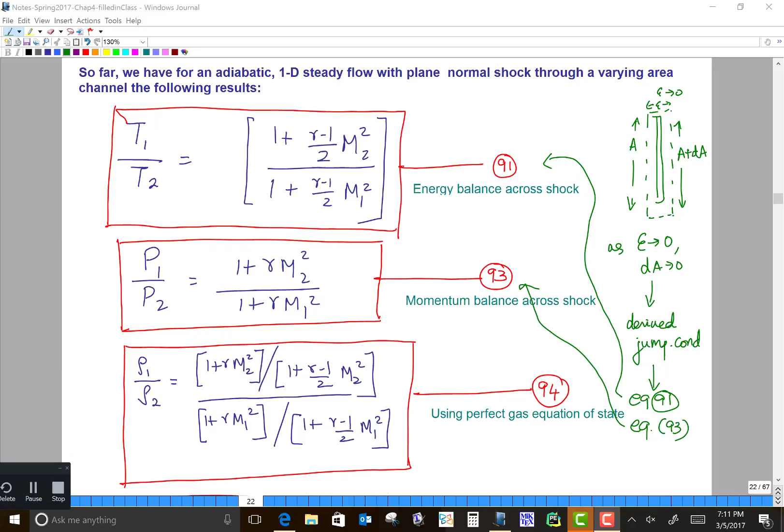We derived equation 93, which is here. And let me put this somewhere here. Okay, and what else? Now we assumed an equation of state, which is an ideal gas equation of state, and that gave me equation 94.

Now, the one thing we didn't use so far in deriving these equations is the mass conservation across the shock, or the jump condition derived from mass conservation across the shock. So you take all of this, then add rho 1 v1 equals rho 2 v2, which is the mass conservation across the shock, and simplify it, and you get equation 101. So this is an interesting equation.

This interesting equation 101 is such that if you know M1, and if you know what the gas is, meaning you know gamma for the gas, you can get M2, right?

So what this means is, if you know the inflow Mach number and you know there's going to be a shock, you can get the Mach number before and after. Since the shock is infinitesimally thin, both locations are the same in spatial coordinates, which means the Mach number is not a continuous function. At the location of the shock, x equals a, x equals a plus gives M2, and x equals a minus gives M1, the Mach number ahead of the shock. This means as you go from a minus to a plus, the Mach number drops across the shock.

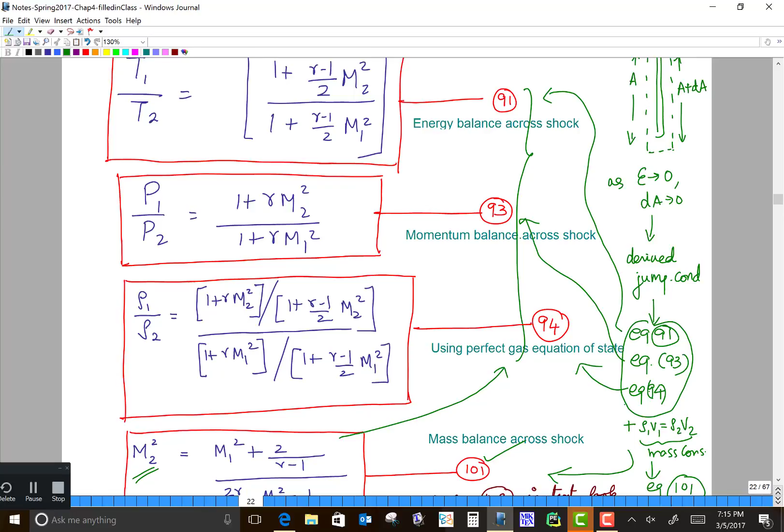From a problem solving standpoint, this helps us, but what is the interpretation? We had some fantastic interpretations last class. The first is that M1 needs to be supersonic and M2 needs to be subsonic for a shock to exist, because the shock is a compression shock, and that's the mechanistic reason. The mathematical or thermodynamic reason is that we computed S2 minus S1, and observed that S2 minus S1 is greater than or equal to 0, satisfying the second law, only when M2 is less than M1.

The other thing we observed is, for this equation: if M1 greater than 1, M2 less than 1, and if M2 greater than 1, M1 tends to be less than 1. So they used to assume pairs of solutions - the same pair works for both M1 and M2 if you switch them. For example, if M1 is 2 and M2 is 0.5, then M1 equals 0.5 would give M2 equals 2. But from the second law, this case is not possible. This means M1 greater than 1, so the incoming flow needs to be supersonic, and M2 less than 1, the outgoing flow behind the shock needs to be subsonic. That's the only solution possible.

And when does this happen? This happens if you take this to this equation, that is P1 by P2 equals 1 plus gamma M2 squared by 1 plus gamma M1 squared. So M2 is less than 1, this is greater than 1, which means P1 by P2, this entire function, is less than 1. Which means P2 is higher, or the flow is getting compressed. So this implies compression.

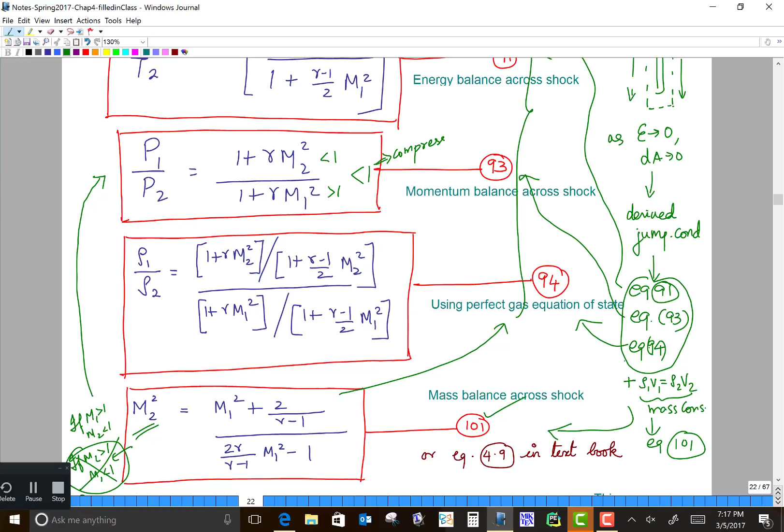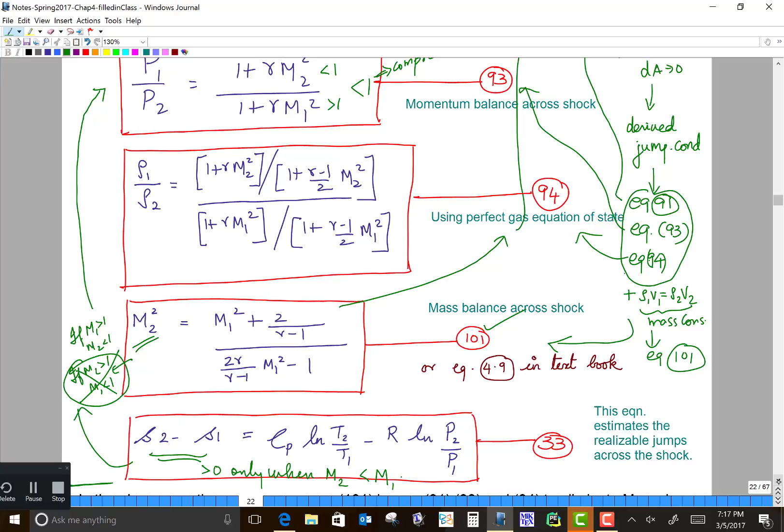So this is the basic idea. We derived these equations and learned quite a bit about the physics, and we observed that only a compression shock is possible. Now it is high time that we relate this material to what we learned in the previous chapter. In chapter 3, what did we focus on? We focused primarily on isentropic flow, specifically isentropic flow in a nozzle. And what did we say there?

So we discussed a lot of physics there, but one of the major things we took away is that P, T, rho, M are all functions of X, and P naught, T naught, rho naught are invariants. This implies that if I know P naught and P at say x1, I can get M of x1. And if I add T naught, I can get T of x1, which means I can get rho naught and rho of x1. So if I know P naught and the pressure at any location, I can get the Mach number, and if I also know T naught, I can get the temperature. I can pretty much get everything that I want at that location.

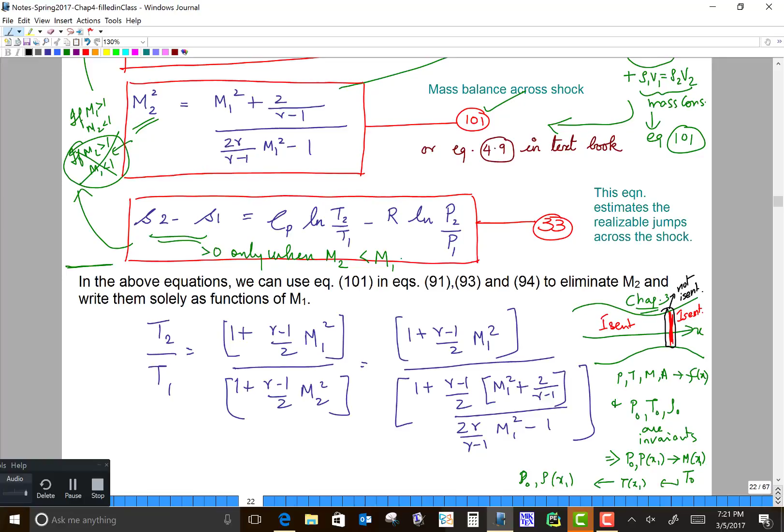So pretty soon, in probably the next few minutes, we will learn how to combine these. But before that, I want you to look at this set of four equations. Let me zoom out a little bit. So we have these four equations: 91, 93, 94, and 101.

These four equations have a structure: the left-hand side is the ratio T1 by T2, P1 by P2, rho1 by rho2 in the first three equations. The right-hand side, if you know gamma, requires M1 and M2. The fourth equation gives M2 as a function of gamma and M1. So if I plug in this expression for M2 squared into each of these equations, T1 by T2, rho1 by rho2, and P1 by P2 can each be written purely as a function of M1.

So now I get three equations relating T1 by T2, P1 by P2, and rho1 by rho2 as functions of Mach number M1, and M2 is already a function of M1. This means if I know M1 and a shock exists, I can get everything about the ratio of property jumps across the shock: the Mach number behind the shock using equation 101, and then plug M2 into 91, 93, and 94 to get the ratios.

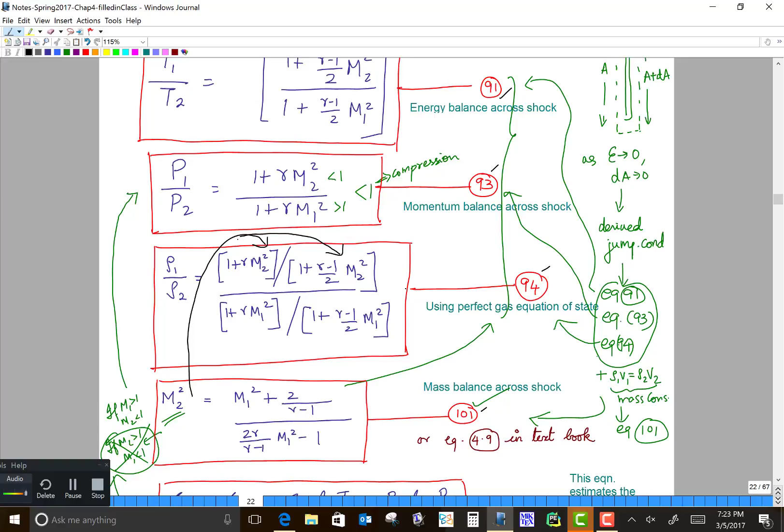So now we're going to derive a new set of equations. Here I'm writing T2 by T1 equals 1 plus gamma minus 1 by 2 times M1 squared, divided by 1 plus gamma minus 1 by 2 times M2 squared.

So use equation 101 for this M2 squared, which is this guy. Let me block this material here, sorry for the messy writing.

Now I'm going to plug this equation 101 that we derived here. This is equation 101. We use that equation 101 to... let's see, okay, where did I go? I'm sorry.

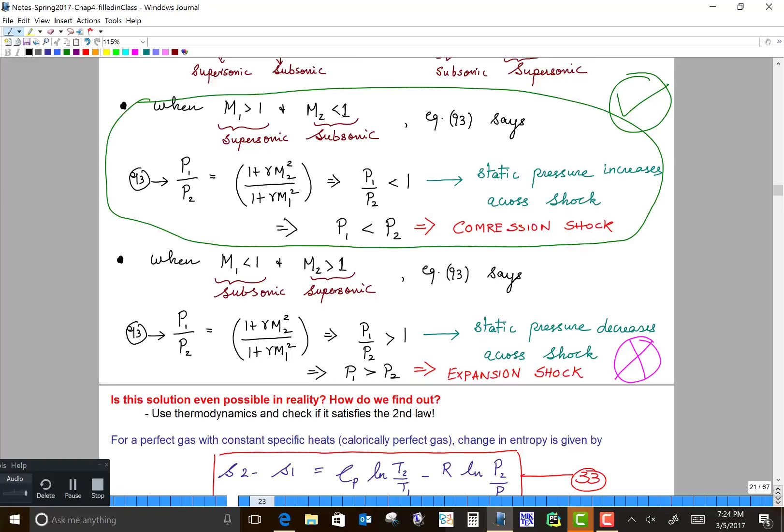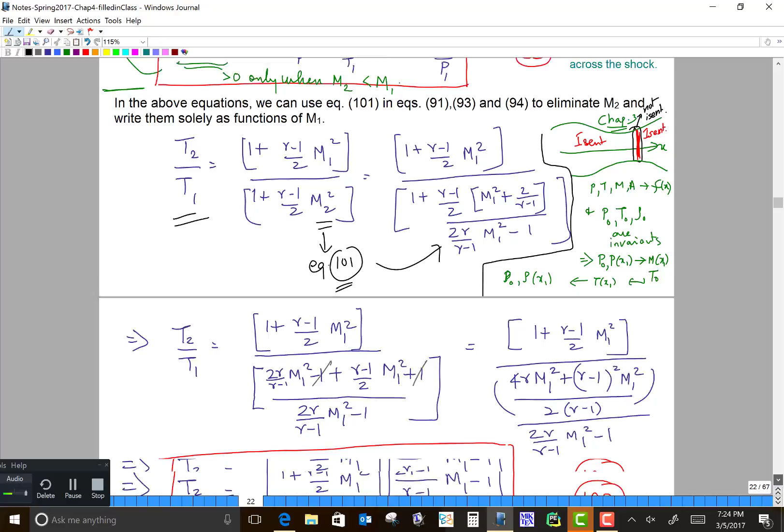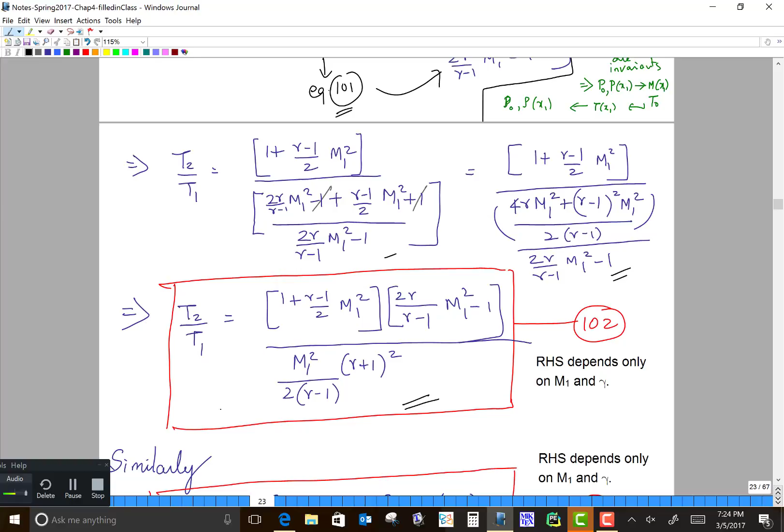So I have this equation 101, plug this in here, and then I'm going to have a slightly messy expression which I can simplify, and I get a nice final expression where T2 by T1 is basically purely a function of M1. So my T2 by T1 equals a function of M1.

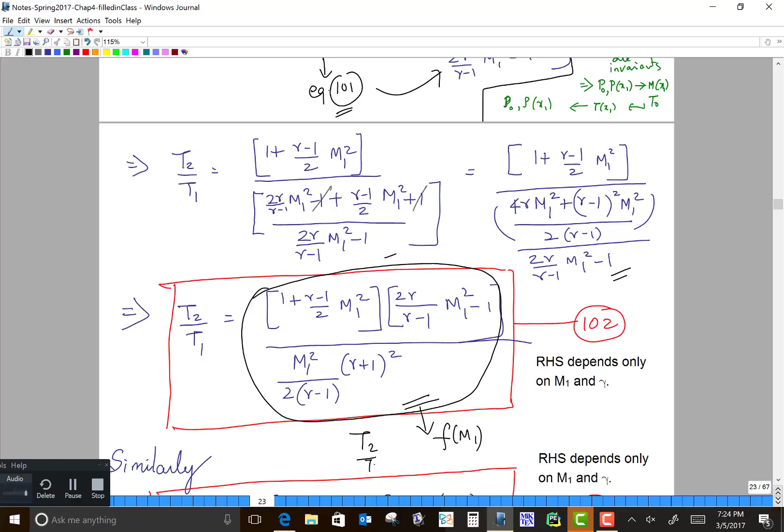Similarly I can derive P2 by P1, which is a function of, let's call this G of M1. In principle it should be G of gamma comma M1, but I'm assuming gamma is a constant that typically does not vary that much. So let's assume gamma is some constant. G is a function, so P2 by P1 is again going to be dependent only on the value of Mach number of the incoming flow, which is M1.

And if you know P2 by P1 and T2 by T1, I can get, using the ideal gas equation of state, meaning using 102 and 103, we get rho 1 by rho 2. So we can do that, and that's pretty much what it is.

Your textbook mentions a subtle observation which I think is useful. What the textbook says is if you use the mass conservation jump condition, you get rho 1 v1 equals rho 2 v2. So instead of using this approach, it uses this equation, and your rho 1 by rho 2 is nothing but v2 by v1. This is a useful relationship.

And writing this v2 as a function of Mach number times speed of sound, so it's M2 times a2 divided by this, which is M2 a2, and this is M1 a1. So now I have this v2.

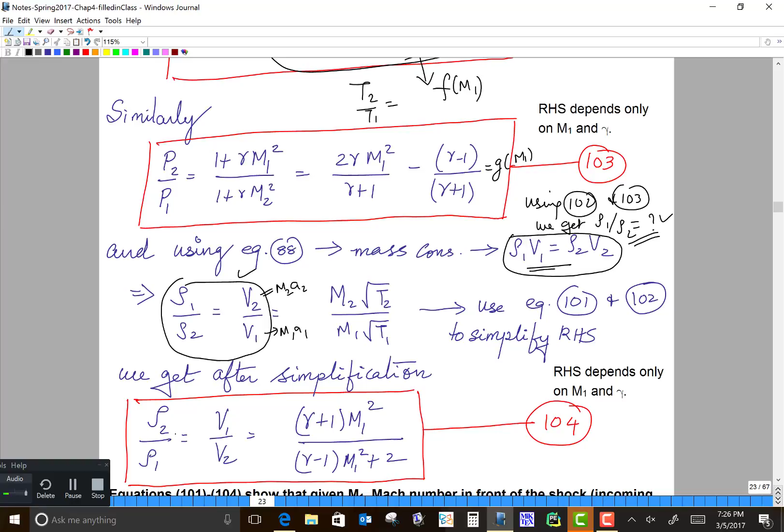It's amazing, I have skipped the steps here, but it's easy to derive. So my rho 2 by rho 1 equals V1 by V2 equals gamma plus 1 M1 squared divided by gamma minus 1 M1 squared plus 2. So this is quite interesting.

So if you know rho 2 by rho 1 using the mass conservation, I can also get V1 by V2. This is an interesting part of the notes that I want to highlight.

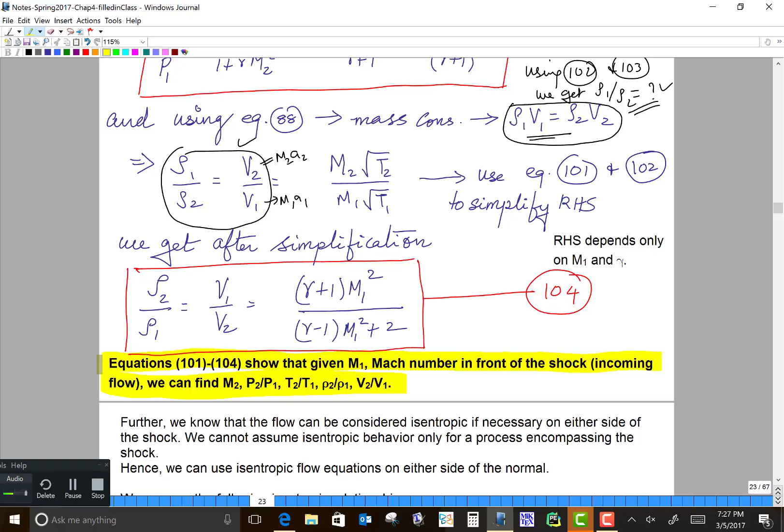So I've numbered this new set of equations as 104 for rho 2 by rho 1, 103 for P2 by P1, and 102 for T2 by T1. These new equations where T2 by T1, P2 by P1, rho 2 by rho 1 are written purely as a function of Mach number M1 alone.

This is the statement worth highlighting: if I know equations 101 to 104, then knowing M1, I can get M2 from equation 101, P2 by P1 from equation 103, T2 by T1 from equation 102, and rho 2 by rho 1 and V1 by V2 both from equation 104.

So using these equations, I can pretty much get P2 by P1, T2 by T1, and rho 2 by rho 1. That is where we stand right now. I know if I know what M1 is at a given location, and I know that a shock is going to happen at that location in the nozzle, then I know immediately using these expressions.

Imagine I have a nozzle and I have a shock at some location in the diverging section of the nozzle, say at a location where my area is 2 times the throat area, in the diverging section of the nozzle.

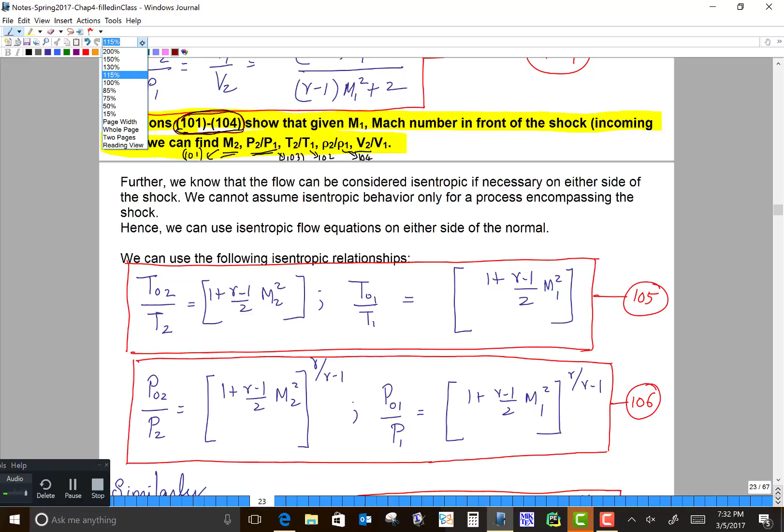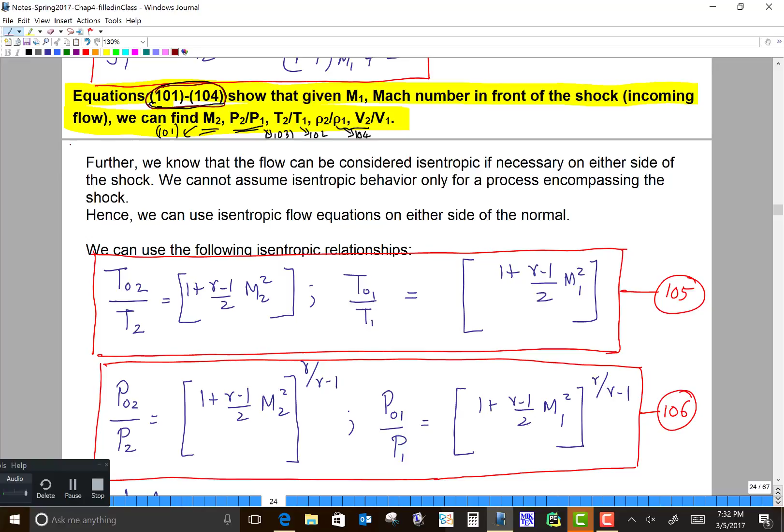So in the nozzle, let me draw a schematic. I'm sorry the size of the document is going to prevent me from making this into a nice big picture, but let's imagine—let me insert a new page here.

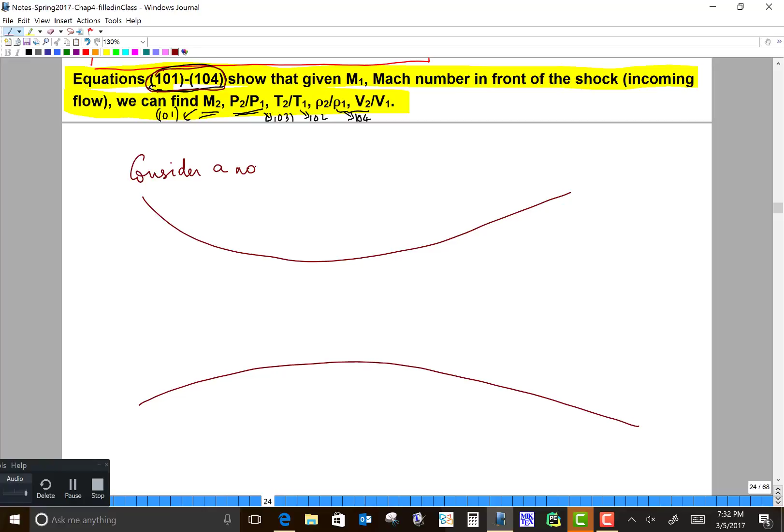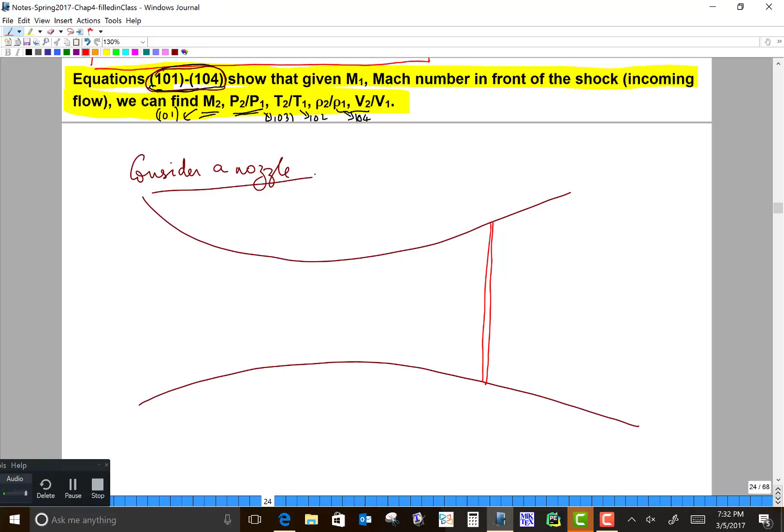So now consider a nozzle like this. Now somehow a shock forms at this location—it's a normal shock.

So here the property at this location—let me draw a small hash line to represent the location in front of the shock and a small location behind the shock. These are separated by an epsilon, and epsilon is very small, say about 10 power minus 7, or about the order of a micron.

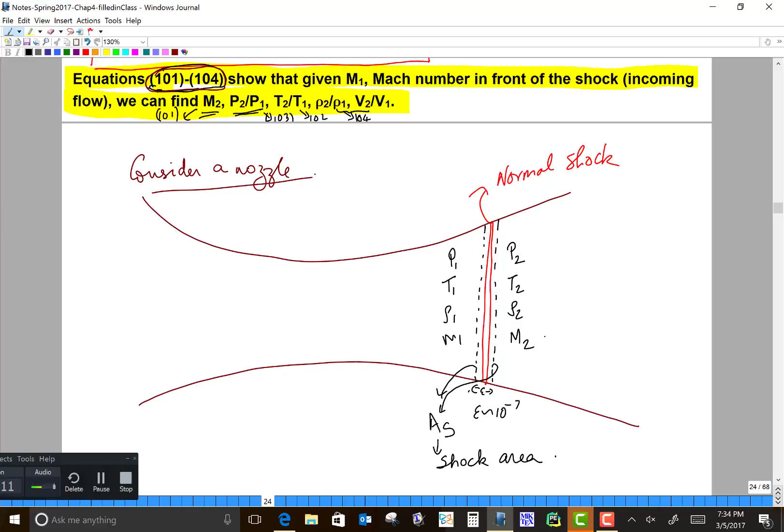So this is epsilon, 10 power minus 7. Then I'm going to have P1, T1, rho 1, M1. Let's call this area and this area both AS, the shock area. And then behind the shock I'm going to have P2, T2, rho 2, M2. Let's call this isentropic flow 1.

Okay, and this is isentropic flow 2. So what did we learn from chapter 3? Each isentropic flow in a 1D steady nozzle flow is characterized by a unique value of P naught and T naught. So let's call this: there is a unique P naught comma 1, T naught comma 1 corresponding to isentropic flow 1, and rho naught comma 1.

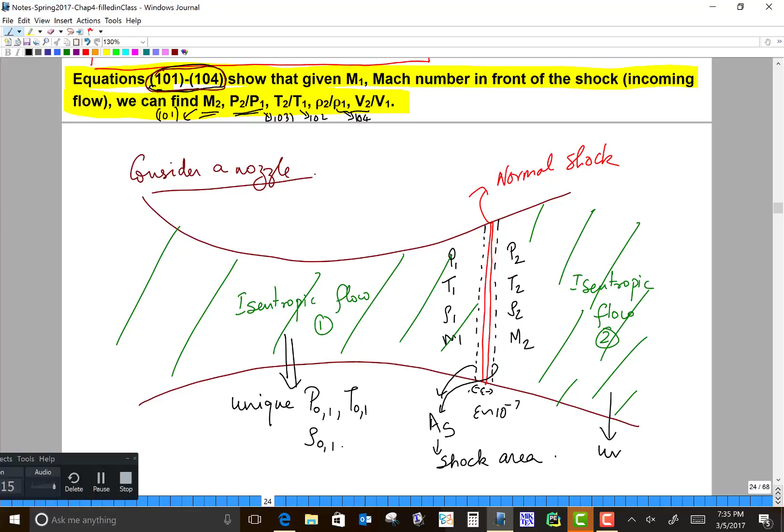Similarly, there is a unique P naught 2, T naught 2, rho naught 2. Okay, I guess I didn't put a comma on the other side, so I'm just going to make it P naught 1, rho naught 1.

Now let me draw this. So let's circle this and this. Now the question is, let me use a blue color: how are these related to each other? And that is the question we are trying to answer. Answer, next page. So that's what we are trying to do.

So what we can do is, for this isentropic flow region 2, you can use the isentropic flow relationships: T02 by T2 equals 1 plus gamma minus 1 by 2, M2 squared. Let me use a different color: this is just behind the shock.

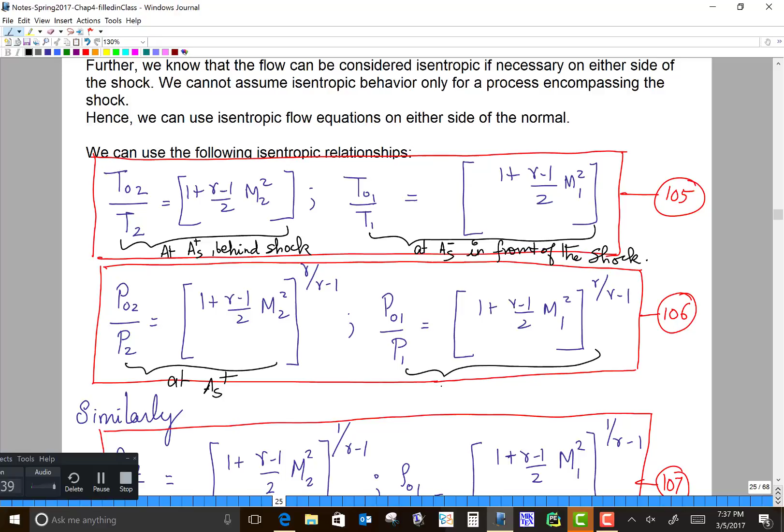And this is valid in front of the shock. So you can call this AS plus, that is just behind the shock, and AS minus, in front of the shock. Similarly, this is AS plus, AS minus. So let me go to the previous image and characterize this.

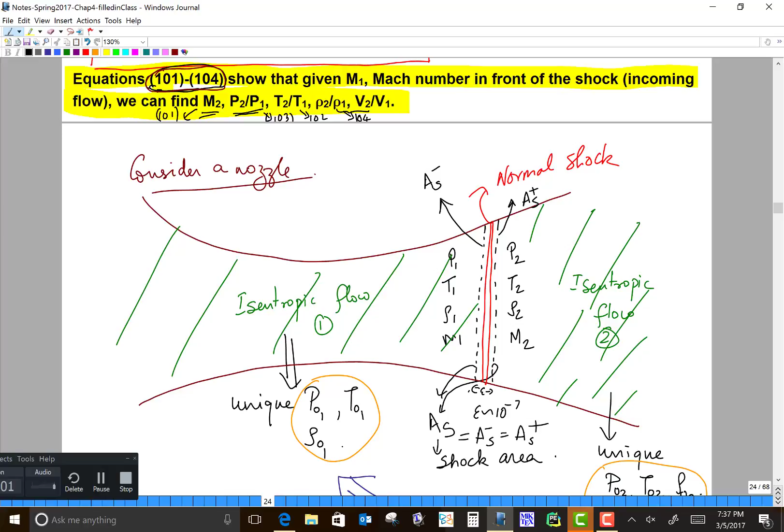So this is AS minus and this is AS plus. AS equals AS minus equals AS plus. Clear? Okay, so mathematically we have cleared it.

So now these expressions are valid because the flow is isentropic just in front of the shock and just behind the shock. The only place where the isentropic relations are not valid is across the shock. But for those regions, we have already computed what P2 by P1 is and what T2 by T1 is, as a function of M1.

So similarly, this is again valid at AS plus, at AS minus. So now you can combine these chapter 3 expressions, these isentropic flow expressions, with the expressions you already derived for the jump in properties across the shock: the T2 by T1 and P2 by P1 expressions from chapter 4. And that's what we are doing here.

So what we are saying is we need to compute this. To compute this, we write it as T02 by T2 times T2 by T1 times T1 by T01. This is the isentropic 2 equation, this is the isentropic 1 equation, and this is the shock jump equation.

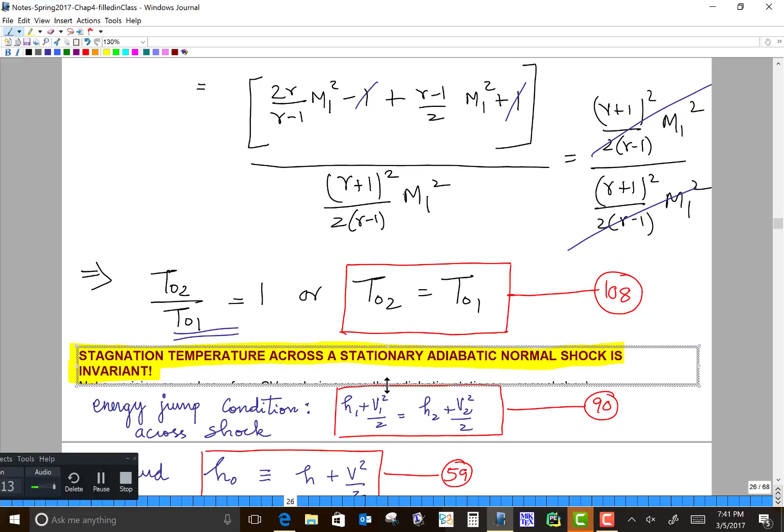And this is not a surprising result at all, and there's a reason why it is not surprising. This is because the control volume analysis for the energy across the shock gives you a jump condition.

And what is that jump condition? It's equation 90: h1 plus v1 squared by 2 equals h2 plus v2 squared by 2, correct? This is the equation.

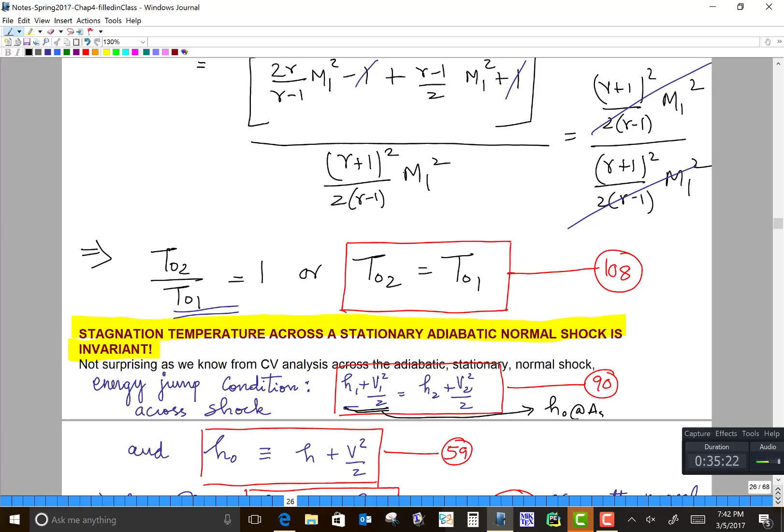So what we observe is your h1 plus v1 squared by 2 is nothing but h naught, but h naught corresponding to what? We can write this as h naught at AS minus, and this guy is h naught at AS plus, okay?

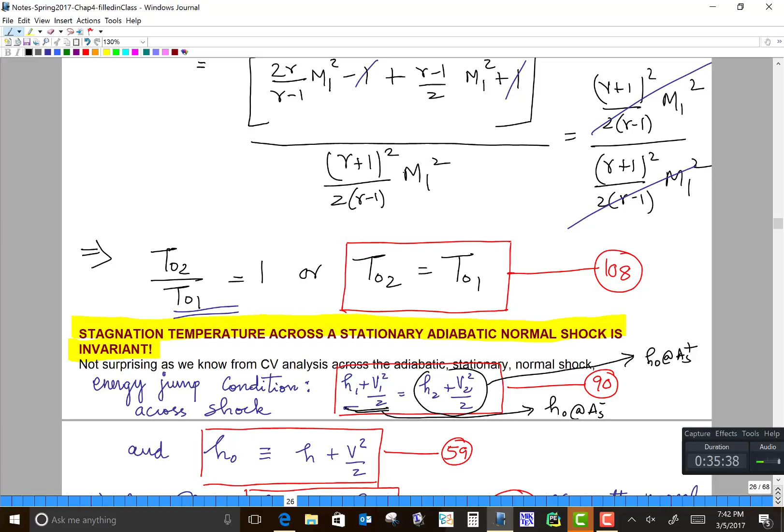And what does this equation tell you? That h naught at AS minus is the same as h naught at AS plus. And what do we know already? That h naught remains invariant for isentropic flow. So h naught at AS minus is the h naught in isentropic flow 1, and h naught at AS plus corresponds to isentropic flow 2. And this tells you that h naught does not change across the shock.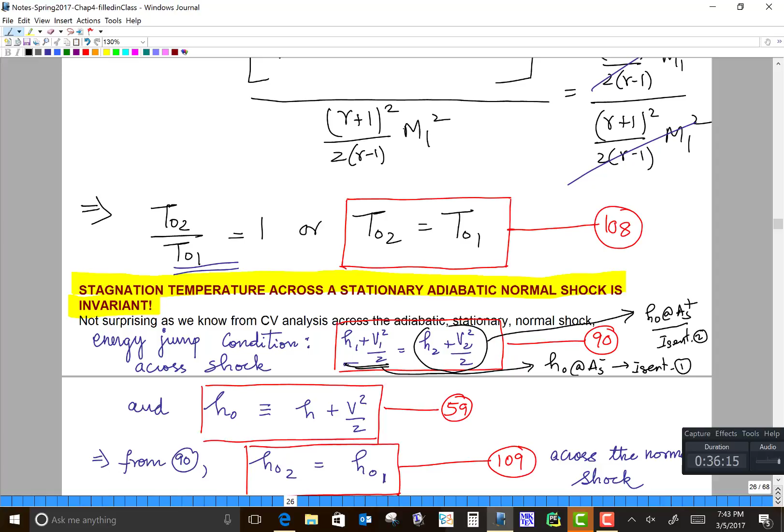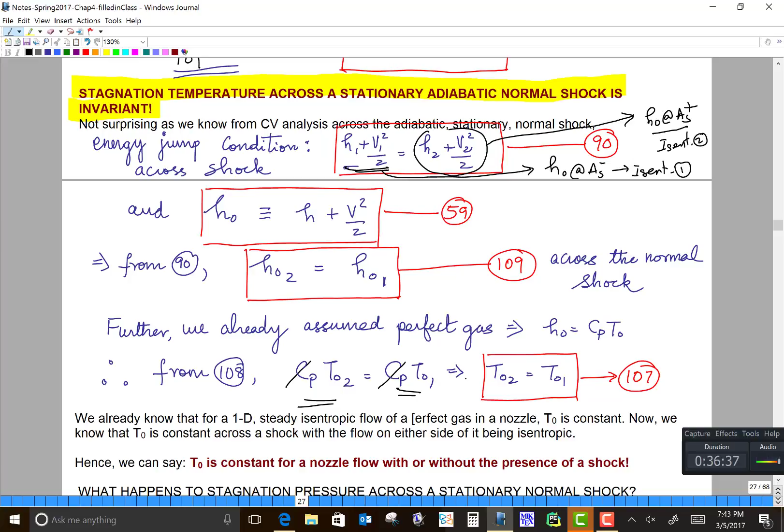That's the jump condition. For a perfect gas where Cp is constant, you can write h naught as Cp times T naught 2 for h naught 2 or h naught at AS plus. And you can write h naught 1 or h naught at AS minus as Cp times T naught 1, which means my T naught 2 equals T naught 1 because Cp is constant. So that's the simple derivation for this flow.

Similarly, I can compute, I know the expression for P naught 2 by P2, this is isentropic flow 2, this is isentropic flow 1, and this is the shock equation. So I can combine these three equations to get P naught 2 by P naught 1 as P naught 2 by P2 times P2 by P1 times P1 by P naught 1.

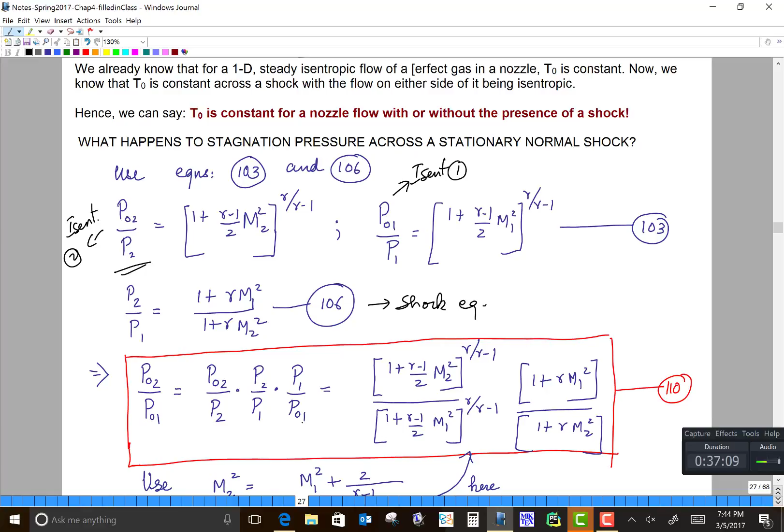So I can simplify this expression and plug in wherever I have M2 squared using this expression. So after much simplification, I have put dot dot dot here - I'm not interested in simplifying it fully. You get this expression: P naught 2 by P naught 1 is gamma plus 1 by 2 M1 squared divided by 1 plus gamma minus 1 by 2 M1 squared, raised to gamma by gamma minus 1, times 1 divided by 2 gamma by gamma plus 1 M1 squared minus gamma minus 1 by gamma plus 1, this entire term raised to 1 by gamma minus 1.

So this term is a complicated expression. This corresponds to equation 4.15 in your textbook and 111 in our notes. This equation relates P naught 2 by P naught 1, the stagnation pressure on either side of the shock, or corresponding to the two isentropic flows on either side of the shock, to the inflow Mach number M1. So this is quite interesting.

So let me ask you - we already know that P2 by P1 is going to be greater than 1, right? Because it's a compression shock. If my M1 is supersonic, M2 is subsonic, which means for supersonic flow, my P2 by P1 is greater than 1. So we know that, correct? Or my P1 by P2 is less than 1.

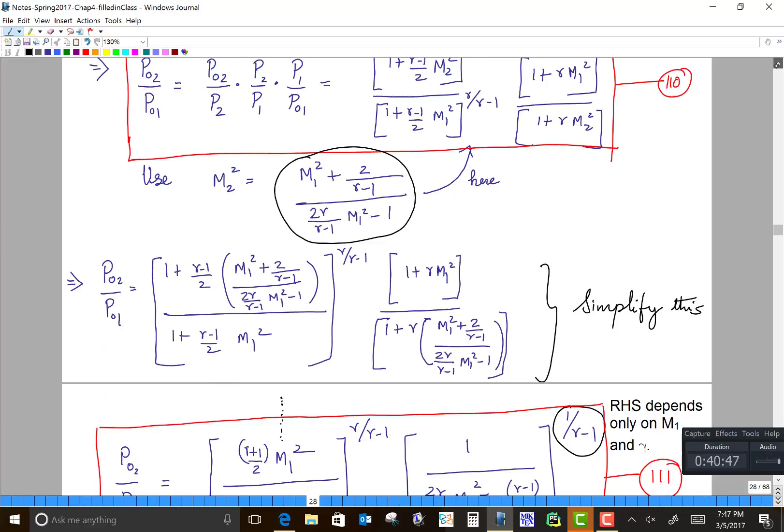Okay, what is my P naught 2 by P naught 1 expression? This is 1 plus... so this is the expression: P naught 2 by P naught 1 equals 1 plus gamma minus 1 by 2 m2 squared divided by 1 plus gamma m2 squared, or 1 plus gamma minus 1 by 2 m2 squared raised to gamma by gamma minus 1, divided by 1 plus gamma m2 squared, should be less than 1. The corresponding expression for m1 squared is 1 plus gamma minus 1 by 2 m1 squared raised to gamma by gamma minus 1, divided by 1 plus gamma m1 squared. So this is the expression, and you want to prove that this is true, be my guest.

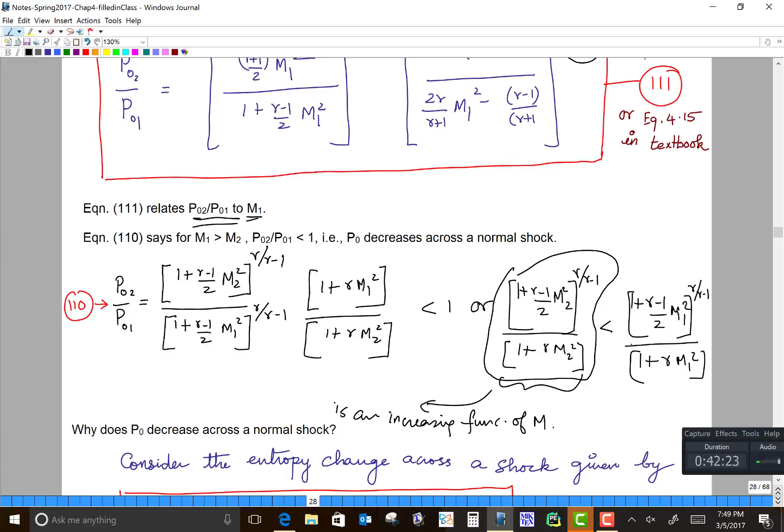But the easiest way to prove is to put values, and you'll see this entire thing is an increasing function of m. So which means if my m2 is smaller than m1, this left hand side is going to be smaller than the right hand side, or the ratio is going to be less than 1. So my P naught 2 is going to decrease across the shock.

And what is the other interpretation? Why does P naught decrease across the shock? My energy doesn't change across the shock, but P naught is the inherent stagnation pressure, and my stagnation pressure itself changes across the shock. And the reason why it changes across the shock is the following.

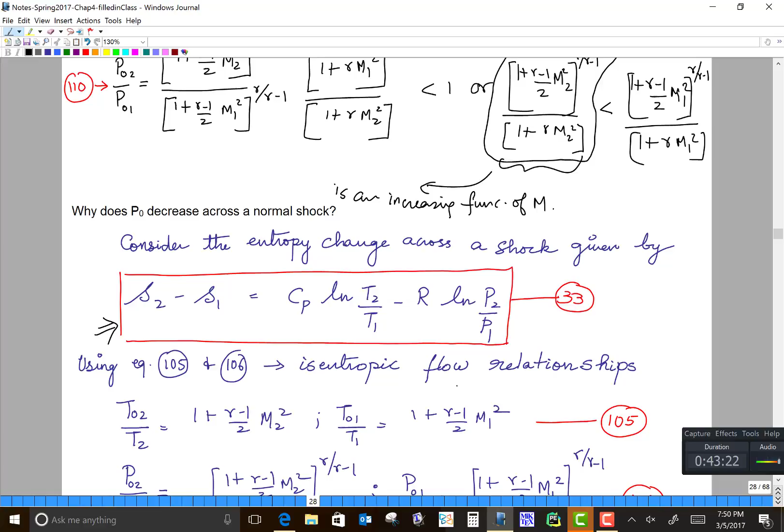So you can consider this equation for entropy, which is something that we derived, right? And this entropy is a state equation, valid across the state, and it's path independent. So in principle, this equation is valid as you go from path 1, from state 1 to state 2. State 1 is in front of the shock and state 2 is behind the shock. Using equations 105 and 106, you can use isentropic flow relationships on either side. So you can write this.

So you can use T naught 2 by T2 is 1 plus gamma minus 1 by 2 m2 squared, T naught 1 by T1 is 1 plus gamma minus 1 by 2 m1 squared. You can similarly use the expression for P naught 2 by P2 and P naught 1 by P1 on either side of the shock. These are isentropic flow expressions, and the flow is isentropic on either side of the shock, so you can use them without feeling guilty.

So what I'm doing here is creating expressions for T2 by T1 and P2 by P1 in terms of T naught 1, T naught 2, P naught 1 and P naught 2. So I'm writing T2 by T1, and this is my P2 by P1 term. As I do this, my T02 and T01 are the same, right? We have already proven that, so I'm going to cancel them, and this is the expression for P02 and P01.

The Cp I'm writing as gamma r by gamma minus 1, which means I can bring this gamma by gamma minus 1 into the logarithm, so it's going to be 1 plus gamma minus 1 by 2 m1 squared raised to gamma by gamma minus 1. So as I do this, my expression is going to be: I can bring this as gamma by gamma minus 1, so that is this first term. The second term I can write as log of some term P02 by P01 times this other term, so I can split this as log of AB equals log of A plus log of B. So I'm writing this as r log P02 by P01 minus r log this other term.

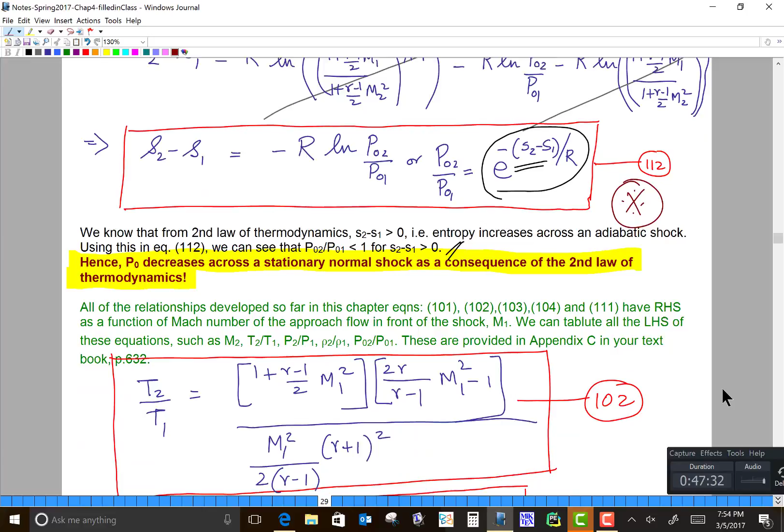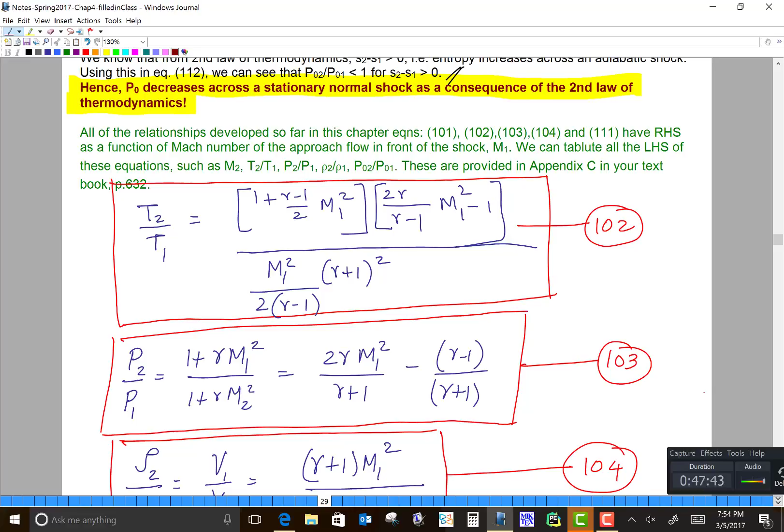Let's see. That is the first thing. Now we have derived a whole bunch of functions: T2/T1 as a function of Mach number, P2/P1 as a function of Mach number, rho2/rho1 as a function of Mach number — equations 101, 102, 103, and 104. Equation 101 is for M2 as a function of Mach number.

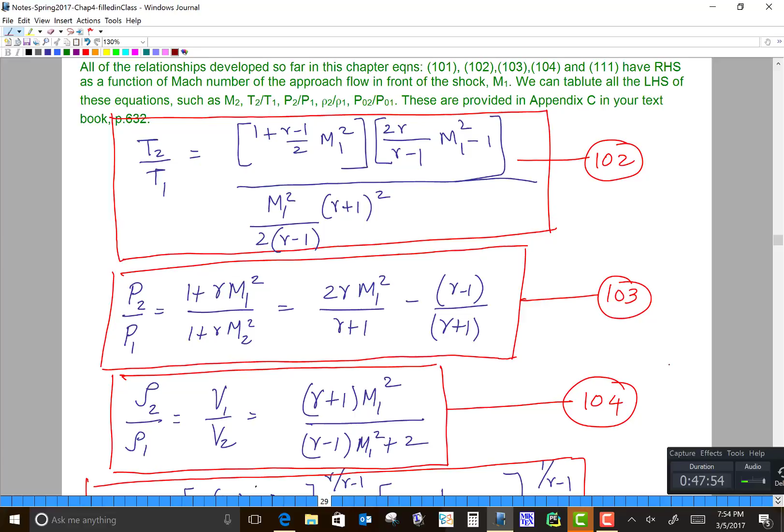Now, in addition, you have another function, P02/P01, also derived as a function of Mach number, which is equation 111. So now you not only have the ratio of the static properties across the shock as a function of Mach number, you also have the stagnation properties across the shock as a function of Mach number. Oh, and by the way, T02/T01 equals 1 — it's not even a function of Mach number.

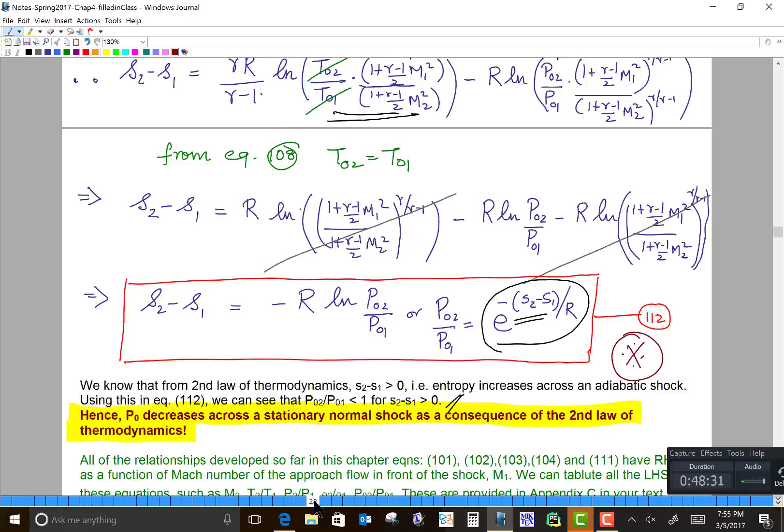That's already there, and if you want to include it here, let's find the equation number. What is it? 28. Let's see what that equation is. 108, right? Okay, so that is equation 108.

So you have all these equations, which means if I know P02/P01 and T02/T01, in principle I can derive rho02/rho01. What is rho02/rho01? Let me see. So you can derive it. This will be the same as rho02/rho01 as well — the same as rho naught 2 by rho naught 1.

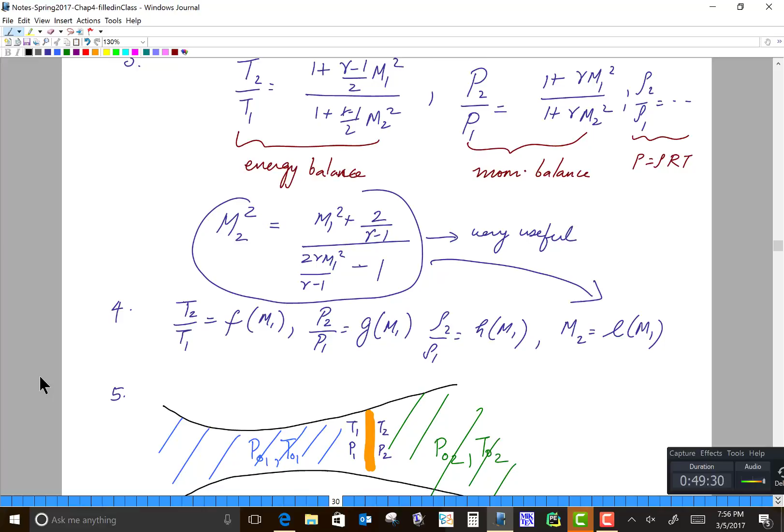So let's take a moment to review all the equations we've derived in chapter 4. We started with the jump conditions, then derived T2/T1 as a function of M1 and M2, and finally derived an equation for M2 in terms of M1. This means we derived new equations that relate T2/T1 purely to the inflow Mach number M1, and then combined these with the corresponding equations for isentropic flow on either side of the shock, giving us equations for T02/T01 and P02/P01 — the change in stagnation temperature and stagnation pressure across the shock.

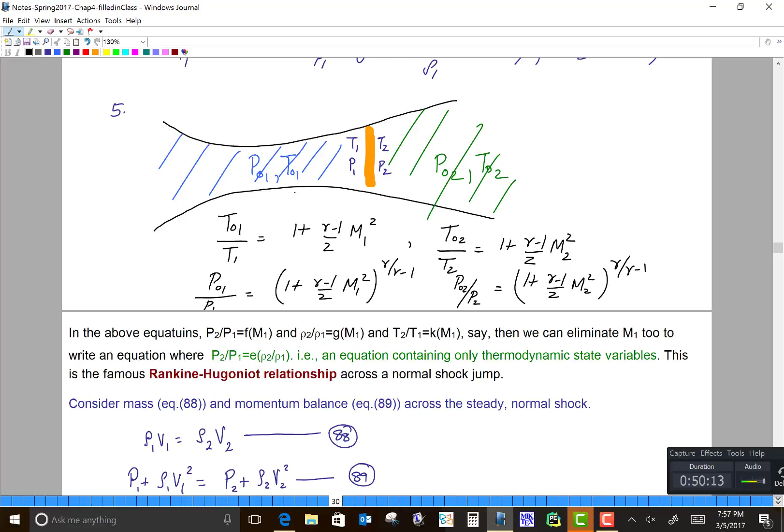For the stagnation temperature, the ratio is 1. For the stagnation pressure, the ratio is a function of Mach number, which is less than 1. So if you look at this system of equations, we derived T2/T1 as a function of Mach number, P2/P1 as another function of Mach number, and rho2/rho1 as another function of Mach number.

So which means in principle, we can have T2 by T1 equals a function alpha of P2 by P1, and P2 by P1 equals another function beta of rho2 by rho1, correct? Okay, that is what we are doing next.

Let me spend another 5 more minutes. We derive what is called the Rankine-Hugoniot relationships. These relationships are basically what I just mentioned, trying to relate P2 by P1 to rho2 by rho1. These are useful relationships. It's not like you have to remember all these equations in every scenario, but sometimes if you know P2 by P1 and directly want rho2 by rho1, or vice versa, it's easy to use these relationships.

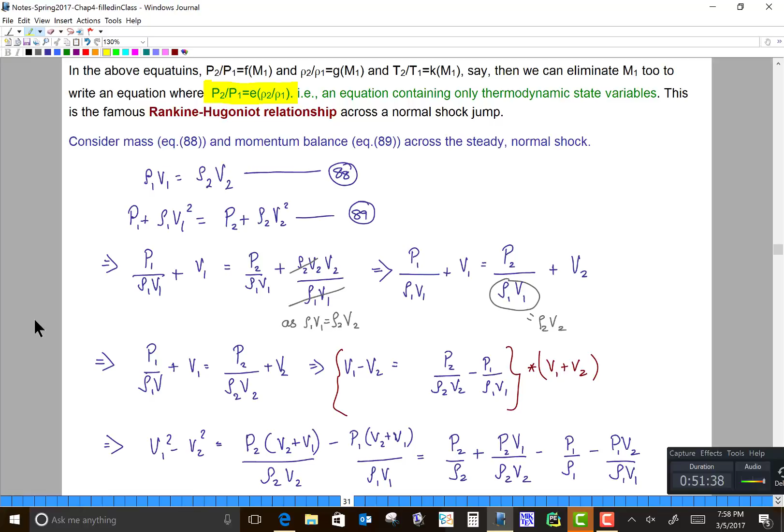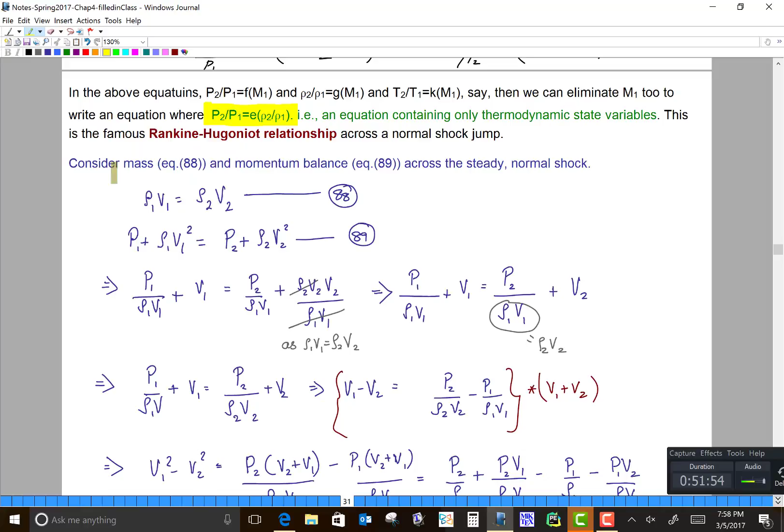There was also some historical significance for this relationship, because there's something called the Riemann problem, which is related to the Rankine-Hugoniot relationship. I'm not going to get into that, but obviously it's easy to derive, and the derivation steps are here.

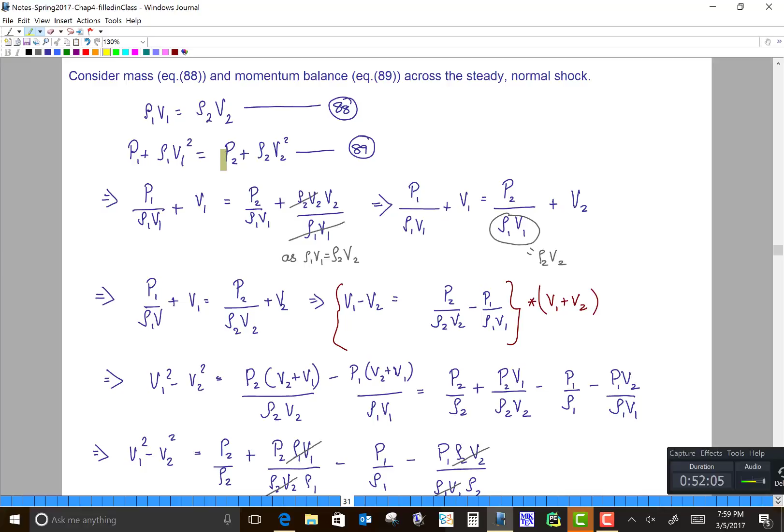Essentially it's using the mass jump condition and the momentum jump condition, which is pretty much the starting point for each of these equations we have derived so far. Using that, you have to do a whole bunch of plug and play and rearrangement of terms, and ultimately you get this really nice equation.

Let me circle this. So you get P2 by P1 as a function of rho2 by rho1, or rho2 by rho1 as a function of P2 by P1, which is an interesting relationship. It means without knowledge of the inflow Mach number M1 and the sound speed, just by knowing P2 by P1 or rho2 by rho1, you get the jump properties across the shock. Because if you know P2 by P1 and rho2 by rho1, you can get T2 by T1 for a perfect gas, or if you know the equation of state. This is a very interesting observation.

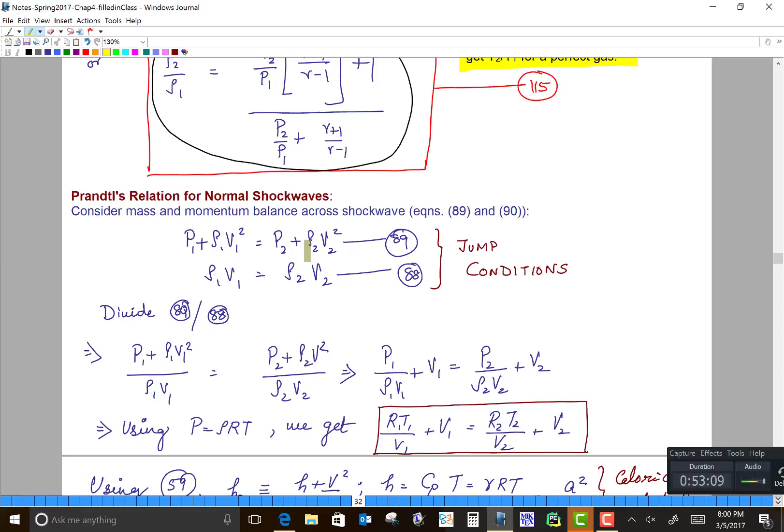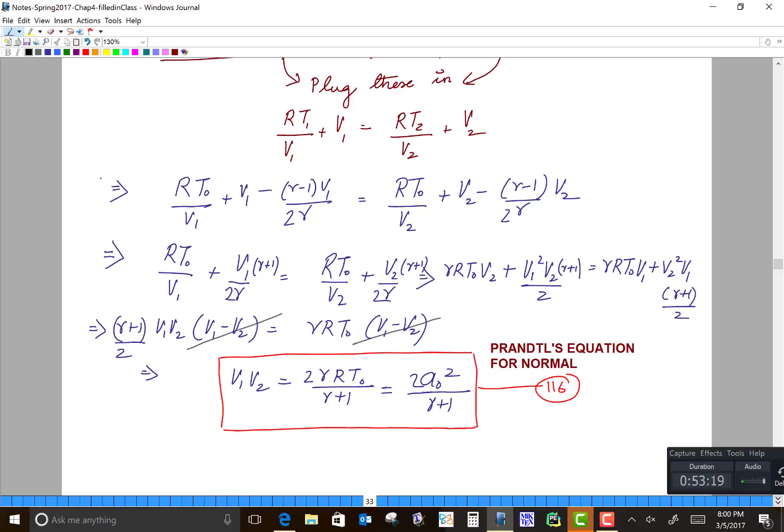There's also another relationship called Prandtl's relationship for normal shock waves. Again, these are all derivative relationships, and the Prandtl relationship again originates from the jump conditions. You start with the jump conditions and play around with a whole bunch of substitutions. I'm not going to derive these for you, you can read it, but this tells you the Prandtl's equation for normal shocks.

This Prandtl's equation essentially relates V1, V2 to A0 squared, where A0 is the stagnation speed of sound. What is the stagnation speed of sound? It's nothing but gamma R T0, a speed of sound based on the stagnation temperature, that is, if the gas were stationary. It tells you that the product of the velocity behind the shock and in front of the shock is related to the stagnation speed of sound, and it's a constant.

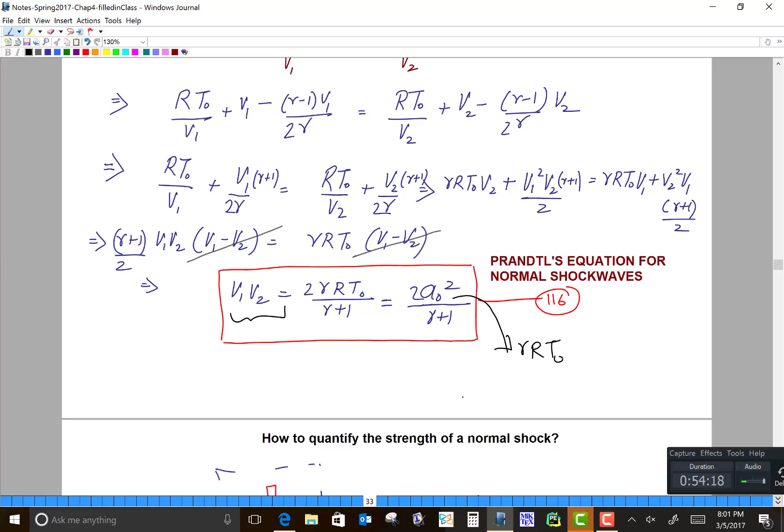So the question is, is this T naught 1 or T naught 2? The answer is it does not matter, as T naught 1 equals T naught 2 equals T naught. The T naught doesn't change across the shock, which means you can have a fixed T naught, and it's the speed of sound corresponding to that T naught.

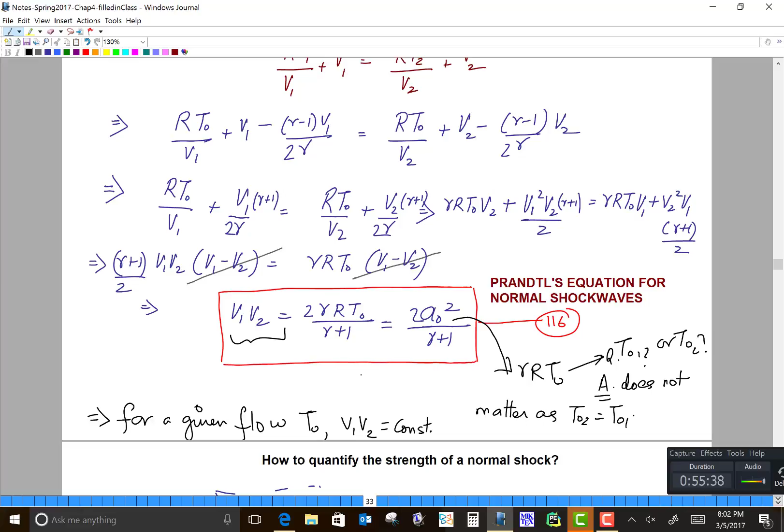So this V1 V2 is a constant, which means for a given flow, T naught, V1, V2 equals constant. It's an interesting relationship. Again, these are not commonly used expressions, but depending on the application problem of interest, you could potentially use this.

Let me take a break here, and in tomorrow's class or the next class, I'll focus on characterizing the strength of the normal shock. Thank you.